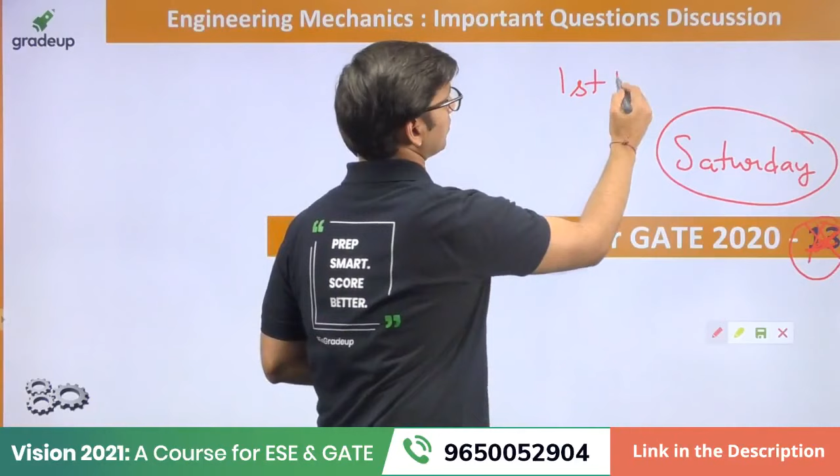So the GATE exam will be on 1st of February, that is on Saturday, so that is very, very important. And I hope you know that Gradeup will be conducting a live analysis on the same day of the GATE exam, where we'll be telling you the solution and expected cutoff on 1st of February after the exam.

I think there's some problem here. Well, I think there's some problem, we just have to hold for some time. First of all, this PPT is not going, the option below is not showing. Why is this not happening?

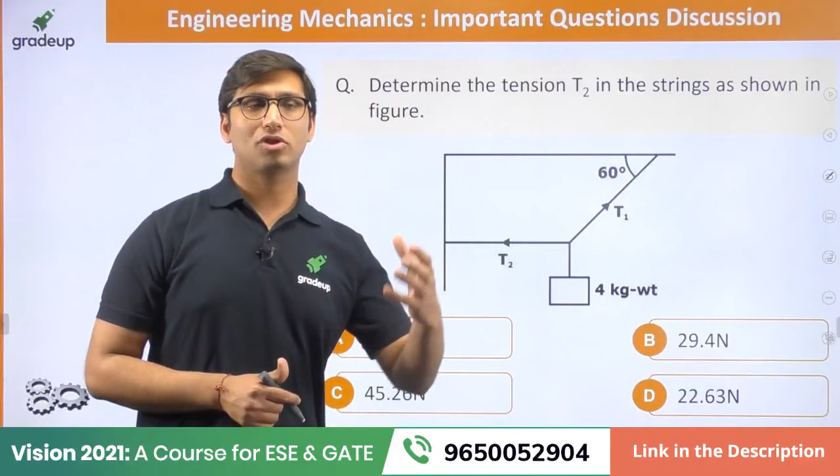Now this is the first question. Normally from free body diagram, the question comes from Lamy's theorem. I hope you know Lamy's theorem. In this question, you have to apply Lamy's theorem and tell me the answer. What is the value of tension T2? You have to determine the value of tension T2 in the string as shown in the figure. The figure is given here. You have to tell the correct answer. I am giving you 1.5 minutes for this question.

Ram Badan Yadav, firstly solve the question, tell me the answer, then I will tell you the solution. These questions are for your practice. Tell me the answer. I have given you a hint that you have to use Lamy's theorem. Whenever you see such a type of question, where there is a point load connected, three loads connected at a point, that is a concurrent system, meaning all the forces will be in equilibrium. So you can use Lamy's theorem. The angle given here is 60 degrees. You just have to find the angle between all the forces and you can solve the question very easily.

Santosh Kumar is giving 19.6. Naveen is getting option D, that is 22.63. Dharmendra Kumar is getting option B. Rishabh Chakravarti D. Amar Bare in the app is getting 22.63, that is option D. Mahesh Booster is getting 22.32 as the answer. So I think we have got enough responses.

The right answer for this question is option D. How to solve this question? To solve this question, you have to apply Lamy's theorem, because you can find these 3 forces are meeting at this point.

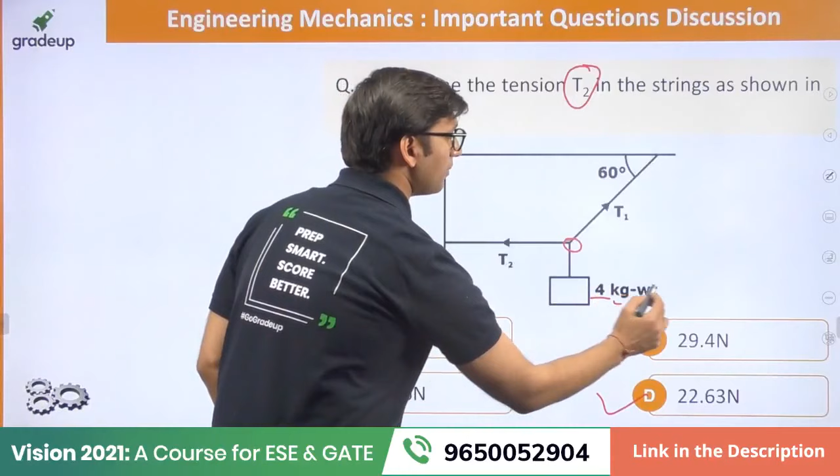Now the weight of this mass is given as 4 kg weight, so mass is 4 kg. Weight will be equal to what? Weight will be equal to 4 into 9.81, acting downwards. So this is the first force, this is the second, this is the third.

If this angle is 60 degrees, then by alternate angle property, this angle will also be 60 degrees. So if you solve by Lamy's theorem, you get T1 over sine of the angle between the forces. If this is T1, you find the angle between these, and that angle between these two forces is 90 degrees.

Then we have T2 over sine of the angle between T2 and these two forces. What will that angle be equal to? That will be equal to 150 degrees, so that's T2 over sine of 150 degrees.

Now this weight is 4 kg, acting downwards, so that equals 4 into 9.81 divided by sine of the angle between the other two forces. What is this angle? If this total angle is 60 degrees, then this total angle will be 120, so that will be sine 120.

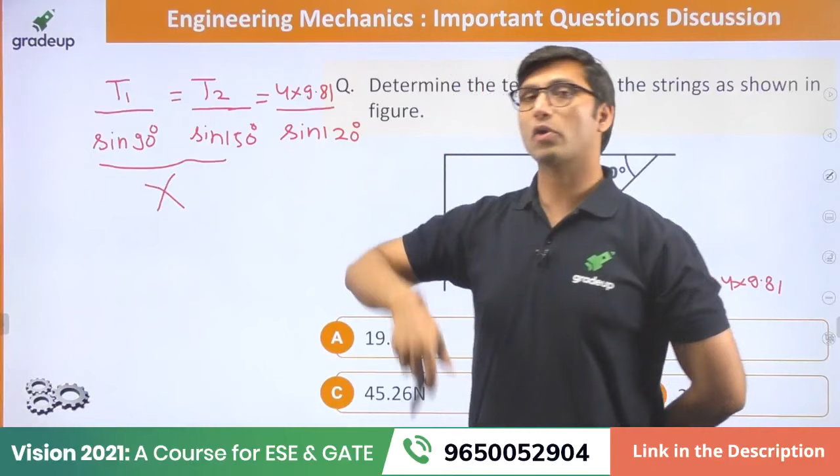Now tell me one thing: if you have to find the value of T2 and both T1 and T2 are unknown, you cannot use that equation to solve the question. You cannot use the first two relations because both are unknown here.

So if you have to find the value of T2, the only thing you can use is this relation, because you have to find the unknown tension T2. Here at least one force is known, the angle is known, and the weight of the body is known to you. So you have to use this relation to solve the question.

So T2 will be equal to sine 150 degrees into 4 into 9.81, divided by sine 120. From here you get T2 as 22.63 Newton. It's a very simple question, but you have to apply this concept.

Yes, those are the last two steps you have to use. You have to identify that in Lamy's theorem, which forces you have to take.

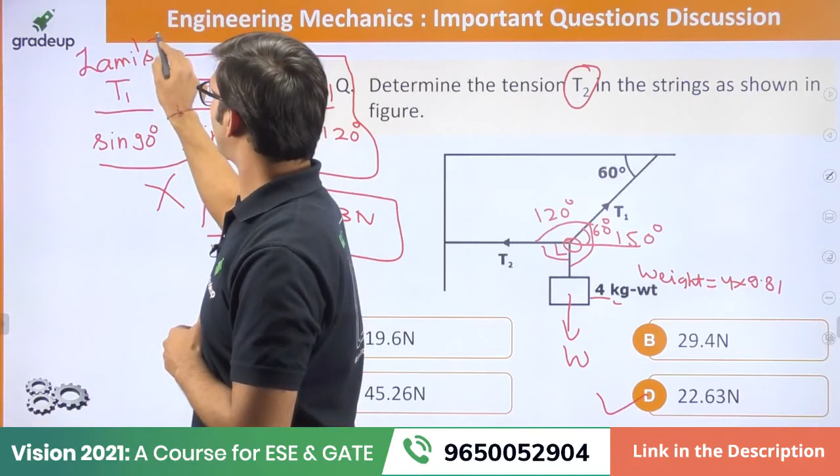Always remember, whenever solving questions on free body diagrams or trusses, try to minimize the number of unknown forces. So here two unknowns are there, but by taking this approach only one unknown remains.

Similarly, if in this question you have to find the value of T1, then you have to take this and this, because at least one force is known here. So whenever solving by Lamy's theorem, use this concept: find the angle between the other two forces, and you can solve the question very easily.

Next question: an object is acted upon by the forces given below, P1, P2, P3. If another force is applied to keep the object in equilibrium, given as AI plus BJ plus CK, then calculate the value of mod of A plus B plus C.

Again, the question is from free body equilibrium of forces. So solve the question and tell me the answer. Again, a very easy question.

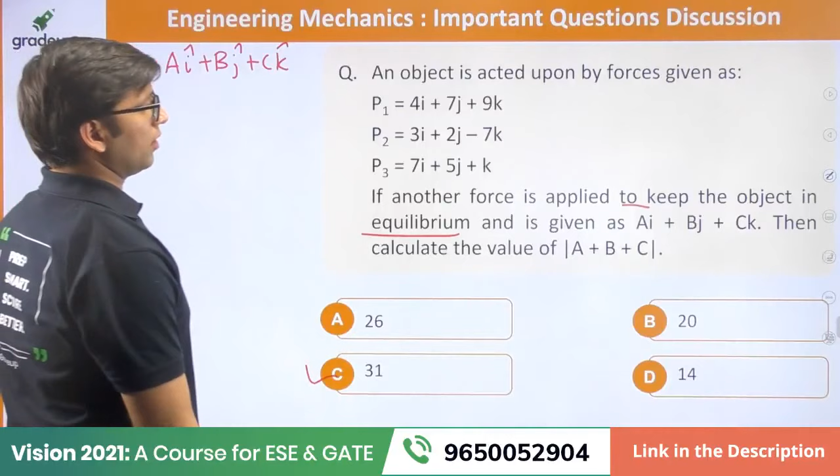Let us say the unknown force is equal to P4, and P4 is equal to AI plus BJ plus CK. Now, if all the forces are in equilibrium, as given in the question, we can say that the summation of all the forces will be equal to 0. So P1 plus P2 plus P3 plus P4 will be equal to 0.

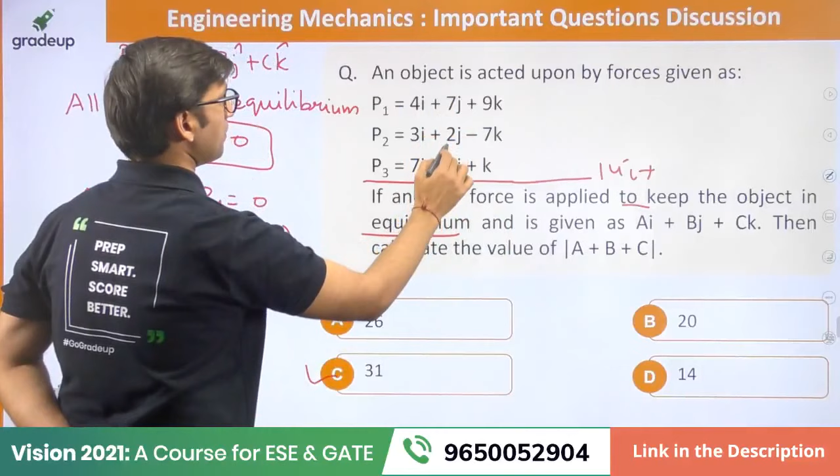So P4 will be equal to minus of P1 plus P2 plus P3. If you add all these 3 forces, you get 4 plus 3 plus 7, that is 14, so you get 14I. Then 7 plus 2 plus 5, that is 14J.

And then 9 plus 1 is 10, 10 minus 7 is 3, that is plus 3K. So you get this value as minus of 14I plus 14J plus 3K, or minus 14I minus 14J minus 3K. That is the value of P4.

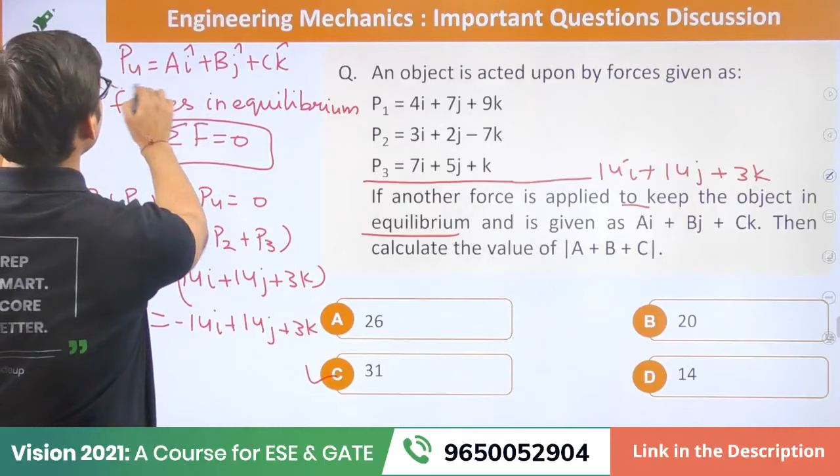Now P4 was equal to AI plus BJ plus CK, as given in the question that the unknown force equals this. So AI plus BJ plus CK is equal to minus 14I minus 14J minus 3K.

If you solve this, you have to find the value of mod of A plus B plus C. If you equate these two terms, you get A equal to minus 14, B equal to minus 14, and C equal to minus 3. So you have to find mod of A plus B plus C, meaning you have to find the positive value, you don't consider the sign.

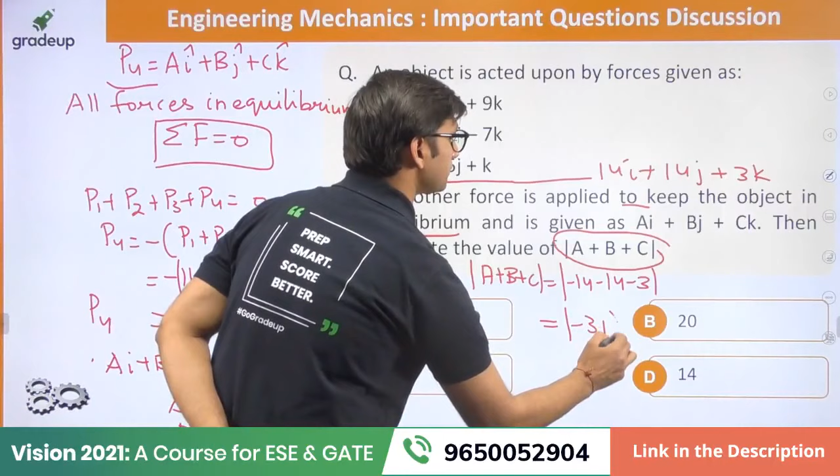From here, A plus B plus C will be equal to minus 14, minus 14, minus 3, which equals minus 31. And mod of any value gives a positive value, so you get 31. So the right answer is option C, that is 31. That was the approach to solving this question on forces in equilibrium.

So you can see we have got two types of questions: one was from Lami's theorem, and the other was from the forces in equilibrium concept.

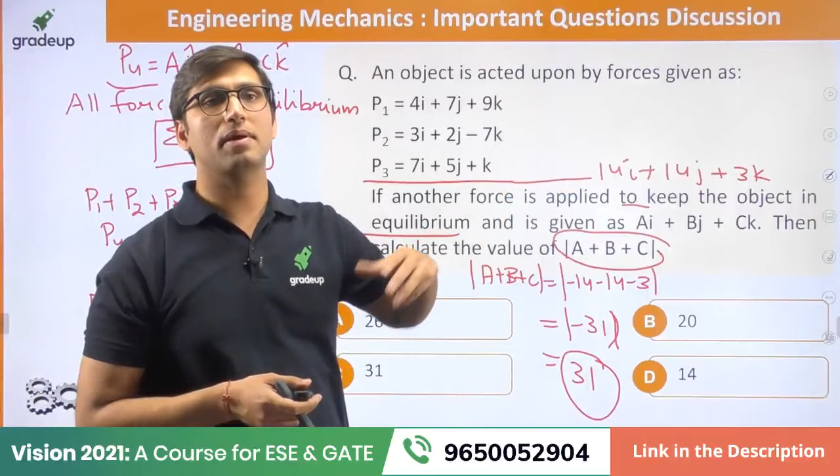Next question, this is from the impact and collision topic of engineering mechanics, again a very important topic, and questions also come from this topic. A small ball of mass 1 kg moving with a velocity of 12 meter per second undergoes a direct central impact with a stationary ball of mass 2 kg.

They are further saying that this impact is perfectly elastic. You have to find the speed of the 2 kg mass of the ball after the impact.

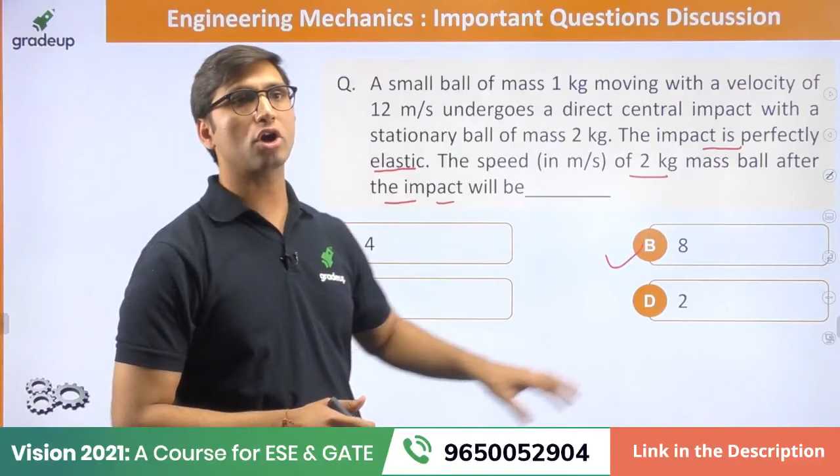Okay, so we have taken enough responses, I think I should tell you the answer. The right answer is option B. So those who have got option B, that is the right answer for this question. Now how to solve the question?

It is a concept of impact and collision. Let us say there are two balls colliding with each other. The mass of the first ball is 1 kg and the second is 2 kg. A small ball of mass 1 kg is moving with a velocity of 12 meter per second and collides with another ball that is stationary, meaning its velocity is 0 meter per second.

So this is before collision. Now let us say after collision, the 1 kg ball has velocity v1 and the 2 kg ball has velocity v2. So this is after collision.

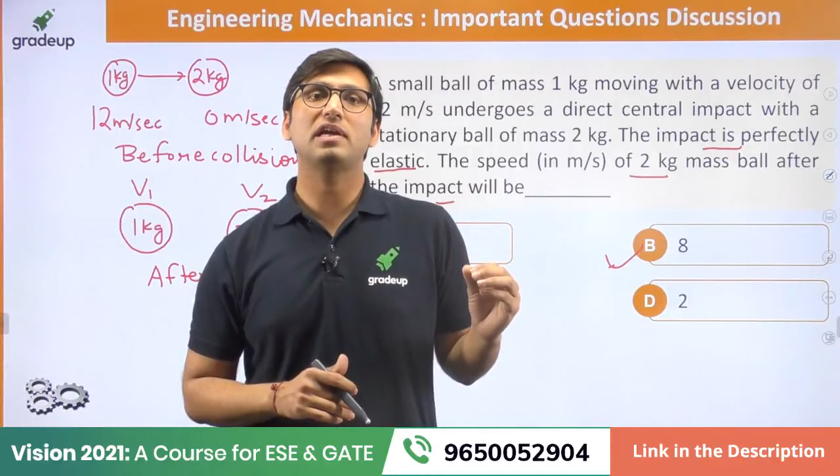In this question, they have told us to take the collision as a perfectly elastic collision. Now what are the conditions of perfectly elastic collision? One thing is for sure: linear momentum will be conserved. If it is elastic, perfectly elastic, or perfectly inelastic collision, linear momentum will always be conserved. So linear momentum is conserved.

Second thing, since it is a perfectly elastic collision, we use the coefficient of restitution. Do you know what is coefficient of restitution? Coefficient of restitution, that is E, will be equal to 1 if it is a perfectly elastic collision.

Now what is coefficient of restitution? It is equal to relative velocity after collision divided by relative velocity before collision.

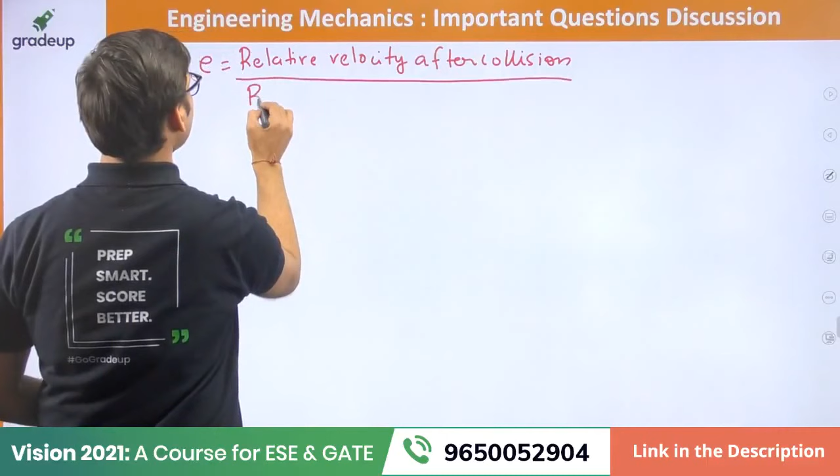Now what is relative velocity before collision? That will be equal to 12 minus 0. Relative velocity after collision will be equal to v2 minus v1. This is equal to E.

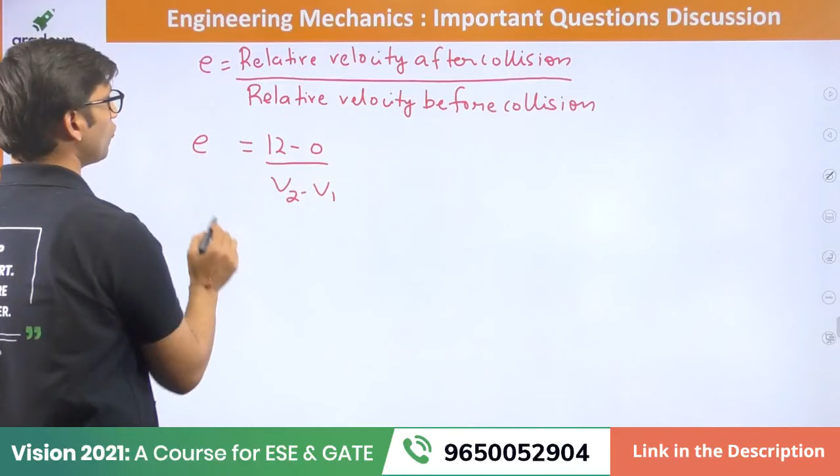Now E is equal to 1 for a perfectly elastic collision. This will be 12 minus 0 over v2 minus v1. So v2 minus v1 will be equal to 12. So you get this equation as the first equation.

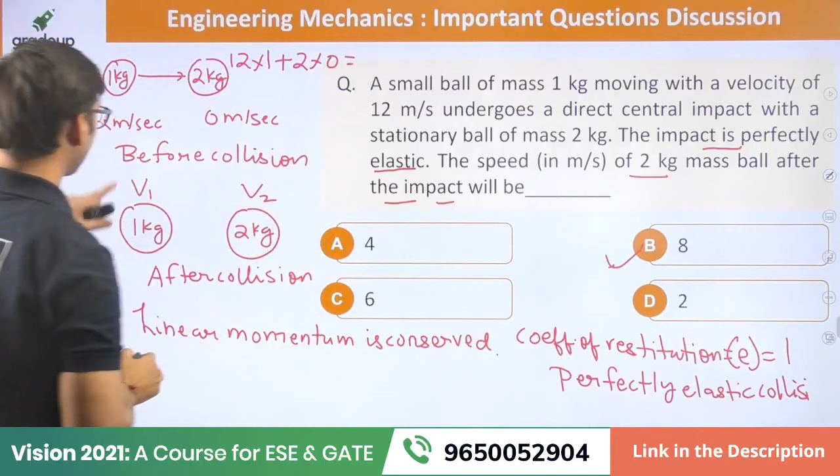Now this is the second equation. The first equation you get from the concept that linear momentum is conserved. If linear momentum is conserved, what can we say? Linear momentum equals mass into velocity. So in this case, it will be equal to 12 into 1 plus 2 into 0, which equals v1 into 1 plus v2 into 2. That is your first equation.

So what do you get from here? This is equal to 0, this is equal to 12. So you get v1 plus 2v2 is equal to 12. That is the first equation.

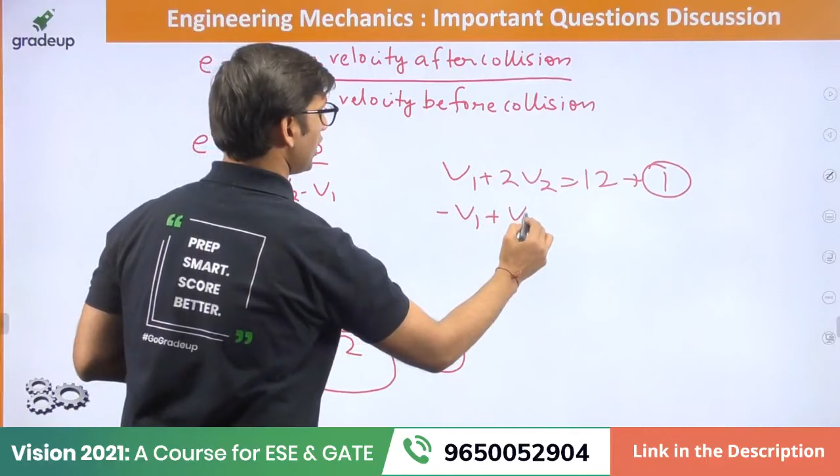And the second equation is minus v1 plus v2 is equal to 12. So we solve this. This gets cancelled, 3v2 will be equal to 24, so v2 will be equal to 8 meter per second.

So in this question, what do you have to find? You have to find the speed of the 2 kg mass after the collision or impact. That comes out equal to 8 meter per second. So the right answer is 8 meter per second.

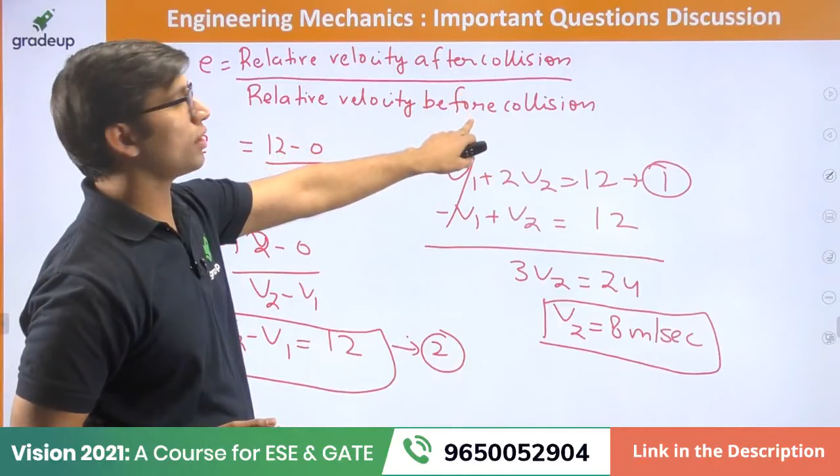Yes, coefficient of restitution is equal to velocity of separation over velocity of approach. You can say that also, that is also a definition. This is called velocity of separation, and this is called velocity of approach. Definitely you guys are right. The definition of coefficient of restitution: it is a term used for impact and collision, and it is defined as the ratio of relative velocity after collision divided by relative velocity before collision. So it is basically the term used for impact and collision.

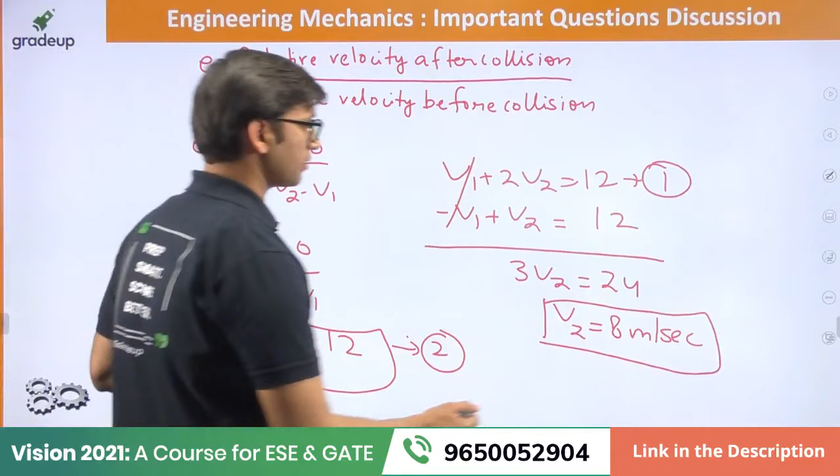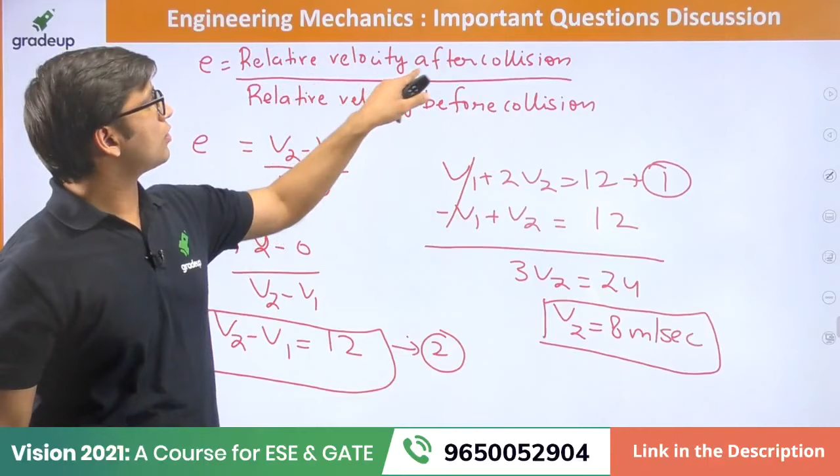Now, that ratio is not written inverse, that is correct. Relative velocity after collision divided by relative velocity before collision. Sorry, that is correct, not correct. So that will be equal to, it is correct, that will be equal to after, that is V2 minus V1 divided by 12 minus 0. That is correct. So it will be V2 minus V1 over 12 minus 0, because we are talking about relative velocity after collision divided by relative velocity before collision.

Next question is again from impact and momentum. This question is from the concept of impact. Impact involves impulse and momentum. Impulse is equal to the rate of change of linear momentum per unit time, that is called impulse. In this question you have to find the impulsive force. Whenever you hit an object, that is called an impulse. Impulse is always defined as force into time - the force applied on a body into time, that is called impulse. So in this question, a nail of mass 0.015 kg is driven into a fixed wooden block.

Yes, Shiva, what is the question? Can girls also give every exam conducted for mechanical engineering, or is there any restriction in some field of work? Shiva, what are you asking? This question is not at all relevant.

There is no restriction for any girls to give the gate exam. Even the fees for the gate exam is also half, I think, as compared to the boys - for male as compared to female, the fees is also half, I think it is 50%. So yes, there is no restriction, why would there be any restriction for girls? There is no restriction for girls in any exams. But I think you should not ask this question, it is given in the brochure of the gate exam. So that is already given there. Girls can give any exam, they can go into defense, they can give gate exam, they can give ESE exam, they can give any kind of exams. There is no restriction for girls.

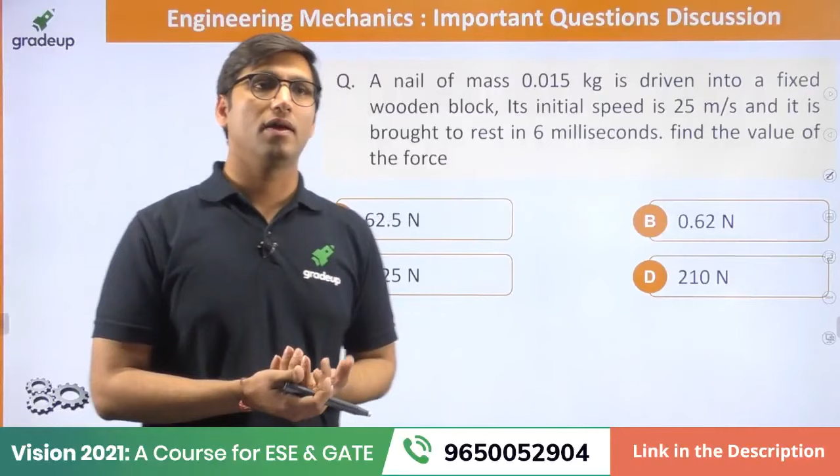We are practicing some good quality, important questions from engineering mechanics. If you don't know about impulse, you really need to brush up your concept again. The right answer for this question is option A, that is 62.5. In this question, they say a nail of mass 0.015 kg is driven into a fixed wooden block.

Its initial speed is 25 and it's brought to rest in 6 milliseconds. Find the value of the force. So what are they saying? They are asking to find the value of force.

This force is equal to rate of change of linear momentum, that is rate of change of linear momentum per unit time. That is called this force. So that will be equal to m of v2 minus v1 divided by time.

Now what is the velocity given here? The velocity in this question is given as the initial speed, which is equal to 25, and the final speed is equal to rest, that means it has come to rest.

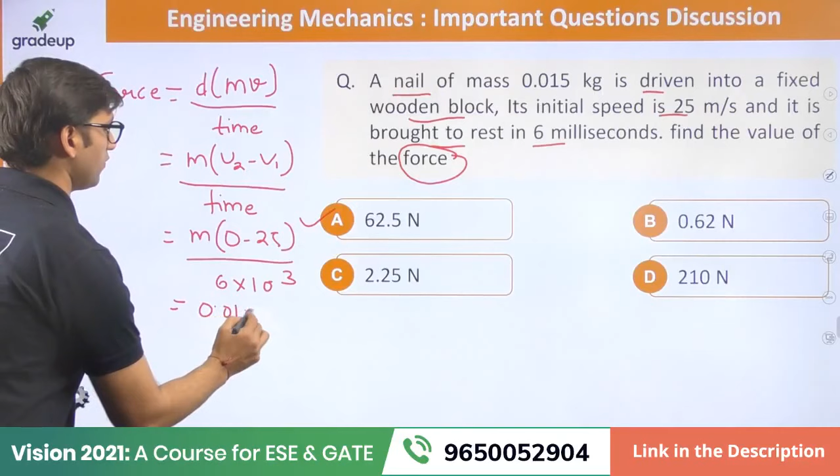So that will be equal to m of v2, which is 0, minus 25, divided by time. Time is equal to 6 milliseconds, that is 6 into 10 power minus 3 second. So mass is equal to 0.015 into minus 25 divided by 6 into 10 power minus 3. From here you will get this value as 62.5 Newton, that is the value of force.

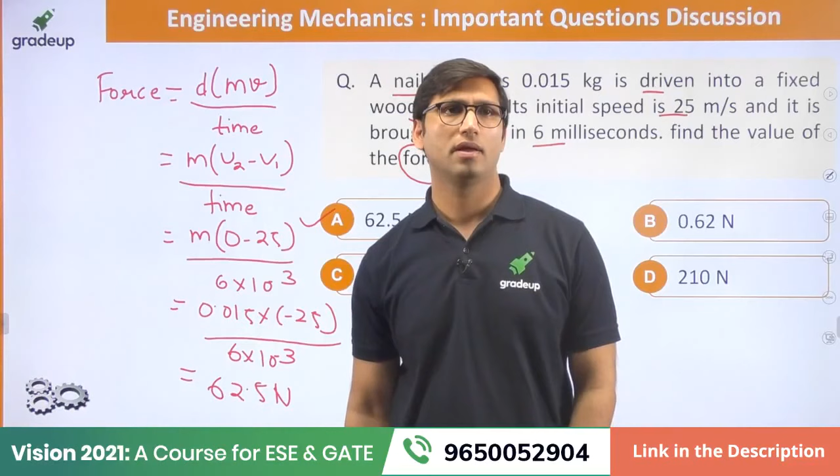I used V is equal to U plus A times T, then I put V equal to 0, and A equal to F by M. You can use any approach for solving this question, ultimately you have to find the force. Either you can use that kinematics equation, V equals U plus AT, from there also you can solve the question.

This engineering mechanics is one of the basic subjects. In this question you have to use the concept of impulse: force is equal to rate of change of linear momentum per unit time. This can also be solved by that equation of kinematics, V equals U plus AT, that can also be used for solving the question, that is F equals M into A.

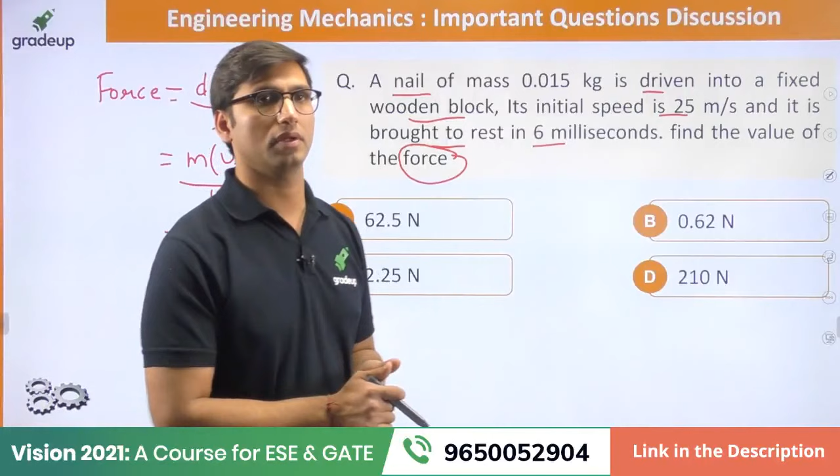So force, mass is given, acceleration you can find from there. Yes, that question can be solved from there also. Sasat Bhattacharya, are you getting the answer by that approach?

So this question can also be solved by V equals U plus AT. Here U is 25, V is equal to 0, so 25 plus A into T, that is 6 into 10 power minus 3. From here you will get the acceleration, and F equals M into A. Mass is given, A you can find from here, so the answer you can get from here also.

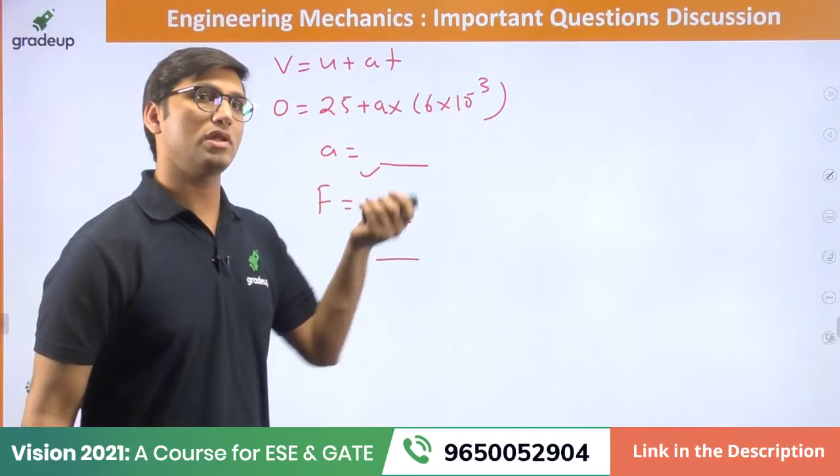We can get the answer from both the approaches. So it's totally up to you which approach you want to use for solving the question, but your concept should be clear in your mind.

Next question: the initial velocity of an object is 40 meter per second. The acceleration A of the object is given by the expression A equals minus 0.1 V, where V is the instantaneous velocity of the object. Find the velocity of the object after 3 seconds. Again a good question from the topic of kinematics of body, so you have to use the equation of kinematics to solve this question.

Come on guys, hurry up, it is a very simple question. Acceleration is given to you. This question again is from the topic of kinematics; you have to use that approach of kinematics and you can solve the question very easily.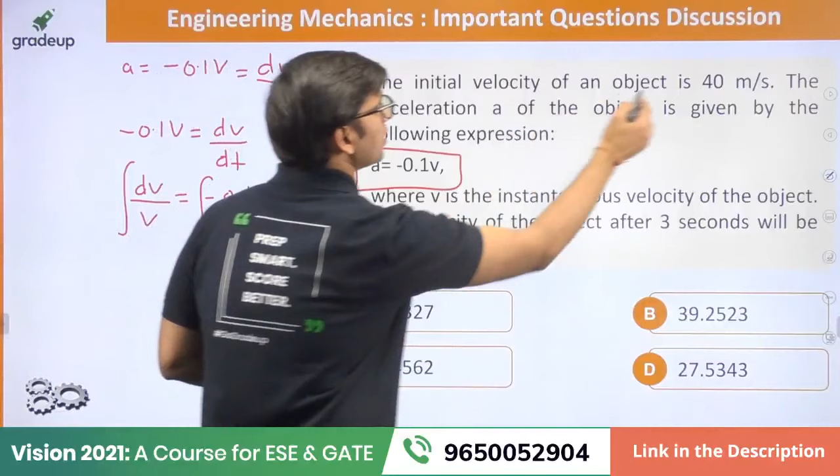So you just have to integrate. The initial velocity is equal to 40, and you have to find the final velocity after 3 seconds. So the limits will be 40 to V, and time from 0 to 3 seconds.

Integrating, you get log of V from 40 to V equal to minus 0.1 into 3 minus 0. So log V minus log 40 is equal to minus 0.3. Solving this equation, log V equals log 40 plus minus 0.3. Taking the anti-log of V, you will find the answer, V equal to 29.63 meter per second, the final velocity after 3 seconds.

So the right answer is option A. Those who have got option A, that is the right approach to solve this question. These are some basic questions; we have not yet moved on to the tough questions. Now let's move on to the next question.

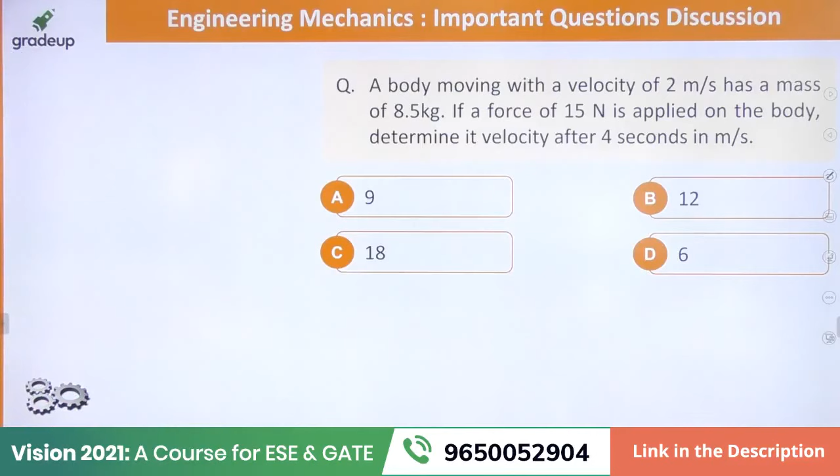A body moving with a velocity of 2 meter per second has a mass of 8.5 kg. If a force of 15 Newton is applied on the body, determine its velocity after 4 seconds in meter per second. Again, a very simple question from the basic concept of engineering mechanics. The force is given, mass is given, velocity is given. You have to find the velocity after 4 seconds.

Vignesh Rana is getting option A. Very quick, Vignesh, very good. Come on guys, you have to be quick like Vignesh and Mahesh Booster. He is boosting his preparation at such a level that he has named himself Mahesh Booster. I know that is not your original name. Adarsh is getting option A for this question. Balaji is getting option A. Nani Charan is getting option A. Shrikant getting option A, Samruddhi is getting option A, Dharmendra Kumar option A, Maddie is getting option A.

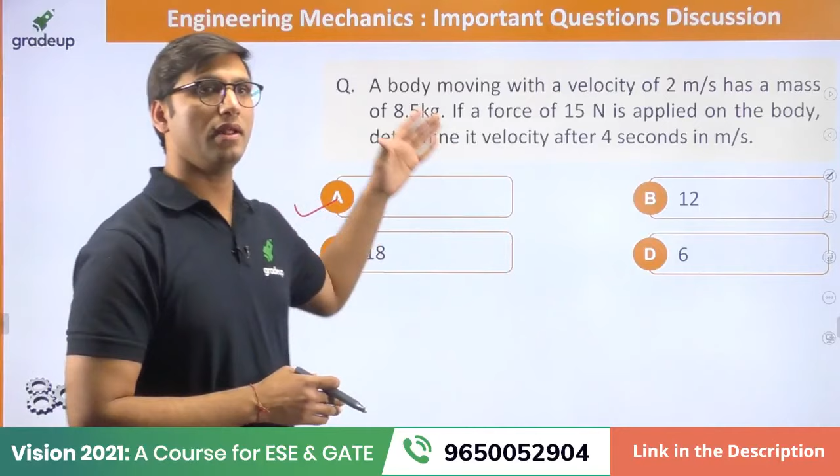I think we should not waste much time on this question, it's very simple. How to solve it? The force is given, mass is given, so F is equal to m into A. From here, acceleration equals F by m, that means 15 divided by 8.5, which gives 1.764, the value of acceleration.

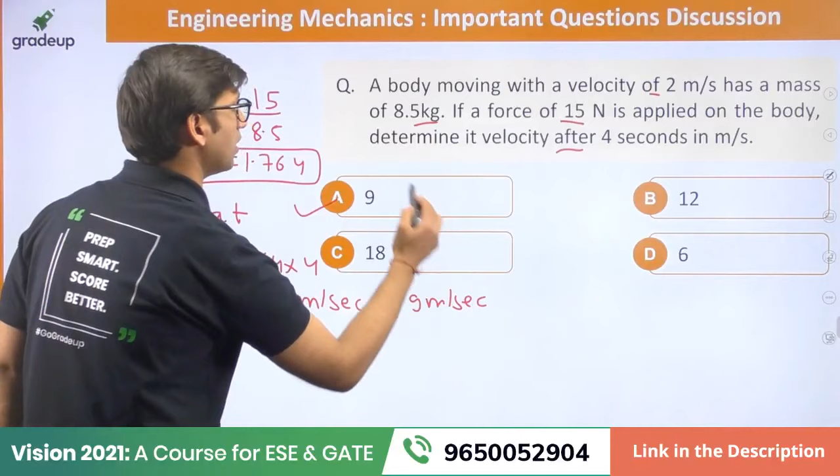Now from the first equation of kinematics, V is equal to U plus AT. You have to find the velocity after 4 seconds, and acceleration you have got. Initial velocity U is equal to 2, so V equals 2 plus 1.764 into 4. Very easy question, you get the answer as 9.05 meter per second, approximately 9 meter per second. So those who got option A, that is the right answer for this question.

Now we have reached another topic. We have practiced the question of free body diagram and equilibrium, and also Lamy's theorem along with kinematics and impulse and momentum.

Let's solve some question of trusses now. In this question they have given a framed structure of height 2 meter and 6 meter span. 6 meter is the total span, that is total length of this structure. It is subjected to 2 point loads at B and D.

So there are 2 point loads. One point load is 8 kilonewton at B. Another point load is at D, suppose this is D. This is another point load, that is 14 kilonewton.

You have to find the reactions at A and C. So you can take your time. I am giving you 2 minutes for this question. Solve it and then tell me the answer.

Balaji, have you already seen this question? How can you be so quick? Dharmendra Kumar is getting option A, Vignesh Rana is getting option A, Balaji is getting option A, Ashutosh Sahu is getting option A. How you guys are so quick? How you are getting the answer very quickly? Very good.

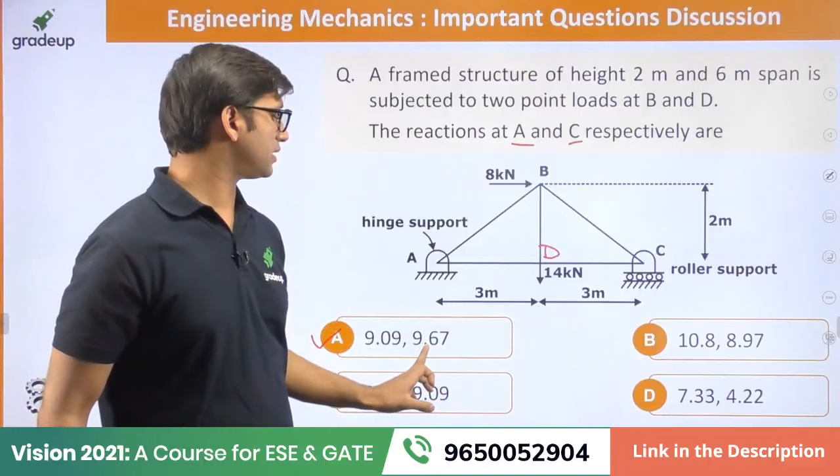If you can solve any one of the reactions, you can match from the options. So if you have to solve the reaction C, you can find that if reaction C is coming out to be 9.67, that is the right answer. That can only be the right answer.

So how to solve this question? They have given that this load is equal to 14 kilonewton. If you remove the roller support, you will get a reaction RC here. If you remove the hinge support, you will get two reactions: one in the horizontal direction RAH, another in the vertical direction RAV. One force of 8 kilonewton is applied here. This distance is equal to 2 meter, and this is 3 meter, and this is 3 meter.

Now the question is how to find the value of reaction at C and the total reaction at A. The total reaction at A will be the resultant of the forces in the horizontal and vertical directions. At the hinge support you get two reaction forces, horizontal and vertical, so to find the total reaction force you have to find the resultant. Now let's start it.

If you have to find this value, you have to equate using equilibrium of forces in the vertical direction, putting it equal to 0. So in the vertical direction we have RAV, 14, and RC. So we have got two unknowns here. You cannot solve this question like that. So how can we solve this question?

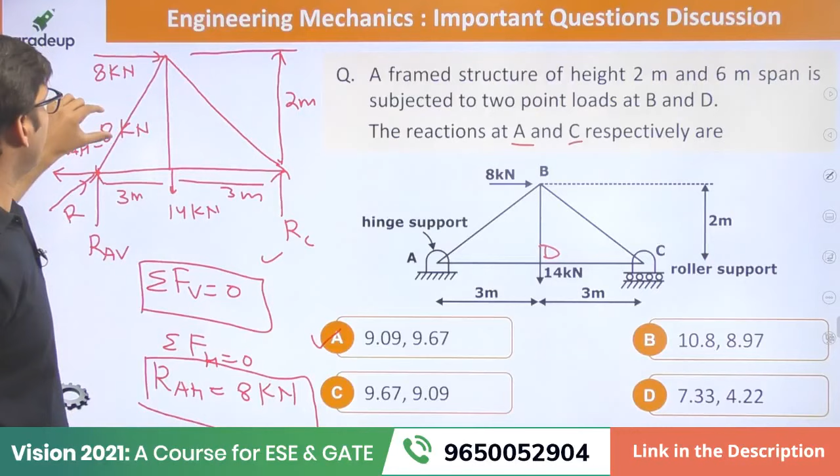Now how to find the value of vertical reactions at A and C? The next approach is to apply equilibrium of forces in the vertical direction, that means RAV plus RC is equal to 14. But this also cannot be used alone for solving the vertical reactions because there are two unknowns here. So how are we going to solve it?

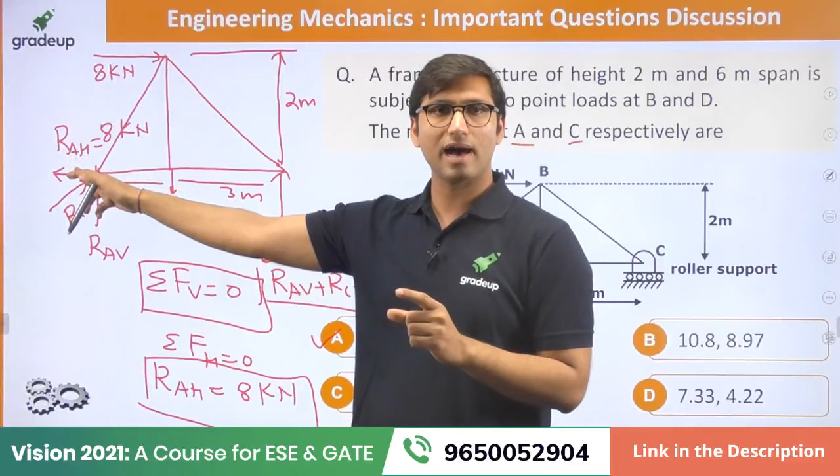Then you have to apply the moment equation. Now the equilibrium of moment can be applied at which place? It should be applied at that support which has got maximum unknowns. Here we have got at least RAH, but we can apply it either at point C or at point A. Let us apply this at point A.

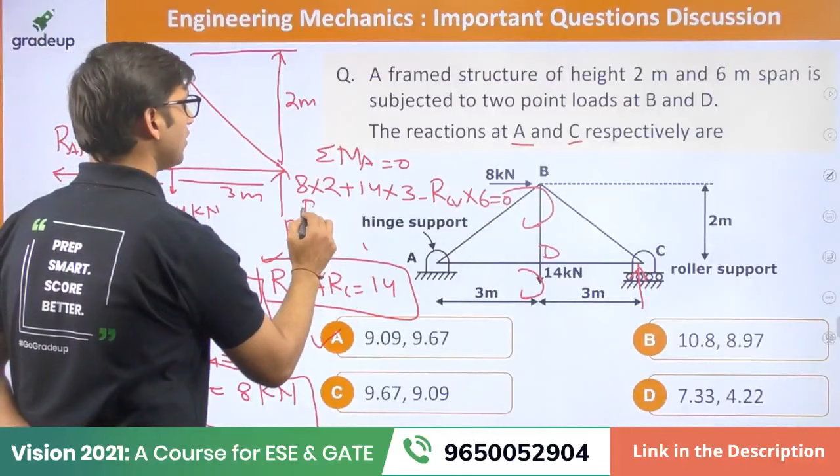Let us apply the equilibrium of the moment at point A and set it equal to 0. The 8 kilonewton force will produce a clockwise moment of 8 into 2. Then we have the force 14, which will also produce a clockwise moment of 14 into 3. Next, in the vertical direction, we have minus RCV into the total distance of 6, equal to 0. Solving this, you get the value of RCV, which comes out to be 9.67 kilonewton, the vertical reaction at point C.

Now how do we find the vertical reaction at point A? Using the equation RAV plus RCV equals 14, you just substitute the 9.67 value to get RAV, the vertical reaction at A. So in this equation, you have to find the reaction at C and total reaction at A. The reaction at C comes out to be 9.67, and from the options you can easily get the answer.

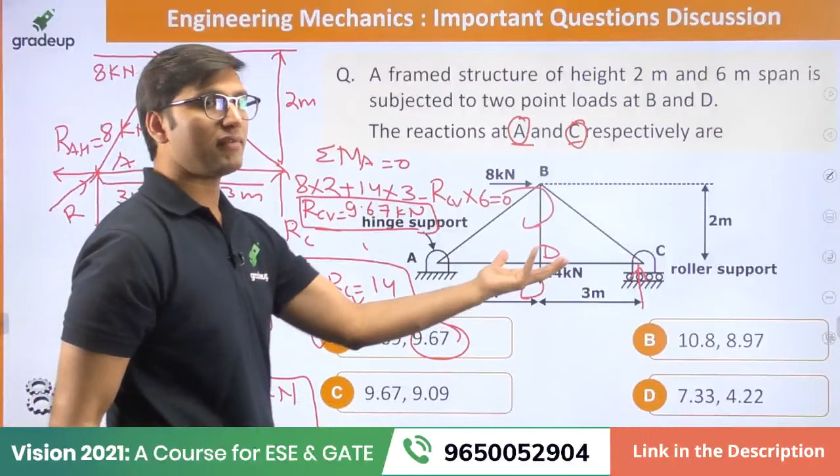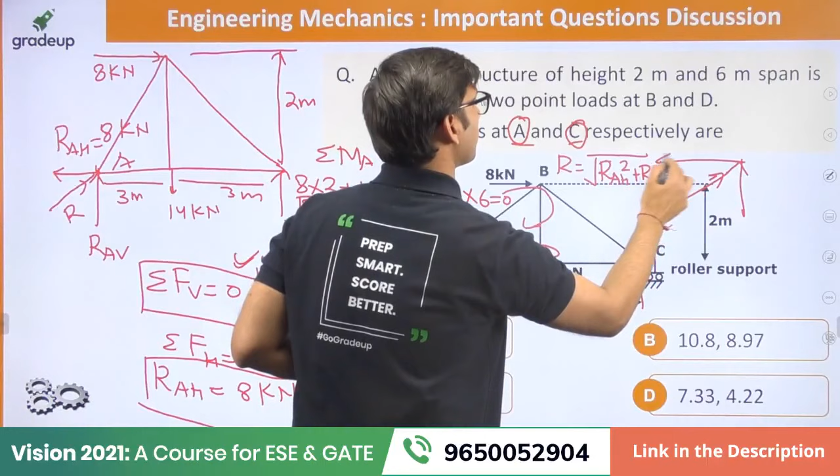But to find the reaction at A, we have two forces, one horizontal and one vertical. So you have to find the resultant of these two forces, which equals the square root of the horizontal reaction squared plus the vertical reaction at A squared. You have the value 8, solve from here and the answer comes out to be 9.09. So for those who haven't solved the question, that is the approach. You have to apply equilibrium of forces and equilibrium of moment. Try to apply the equilibrium of moment at the point with maximum unknowns, it will make the equation much easier to solve.

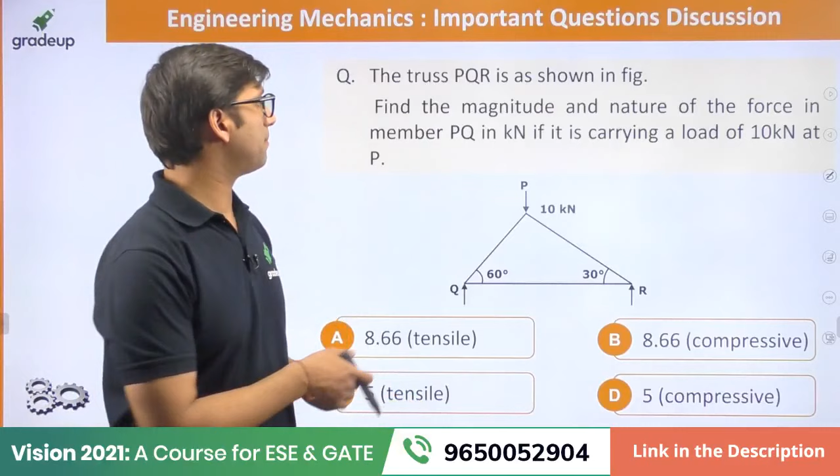Next question, again from the concept of trusses. A truss PQR is shown in the figure. Find the magnitude and nature of the force in member PQ in kilonewton if it is carrying a load of 10 kilonewton at point P. So you have to find force PQ, that means this is force PQ and this is force PR. Use any method that comes to your mind and solve the question.

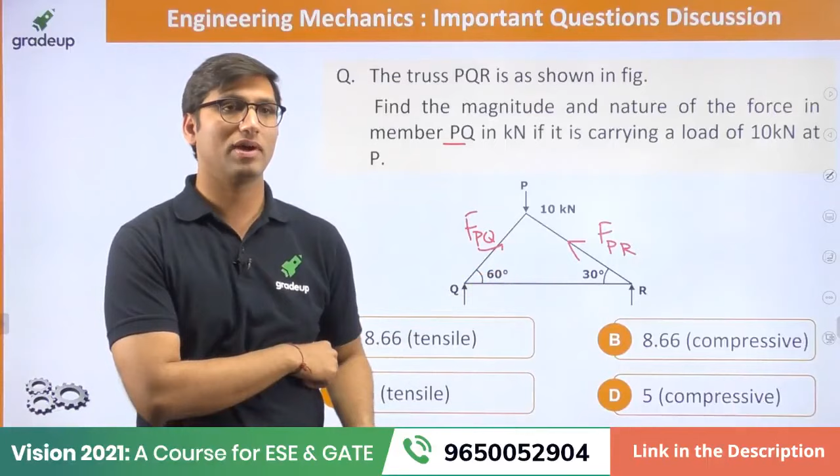In this question they have given this angle as 60, and this as 30. So the total angle equals 180, meaning this is 90 here. So what do we have to find in this equation? We have to find the value of FPQ, the force PQ, and its direction.

Amar Bar is saying 8.66 compressive. Vignesh Rana is getting option B, that is 8.66 compressive. Arbaz Khan is saying compressive 5, meaning option D. Surya is getting option C. Sridhar is getting option B. On YouTube, Rishabh Chakravarti is getting minus 8.66, option B. Mahesh Booster is getting option B too. Looking at the answers in the app and on YouTube, most students are right for this question. The correct answer is option B.

In this question, to find the force FPQ, note that FPQ is the reaction force. This is point P, this is Q, so the force acts in this direction. If you apply the moment, here is P equal to 10 kilonewton, this is FPQ, sorry, FPQ, and this is FPR. This angle is 60 degrees, so this angle will also be 60 degrees, and this is 90, making the complete angle equal to 150 degrees. Similarly, if this angle is 30 degrees, this angle will be 30 degrees too, and the complete angle will equal 120 degrees.

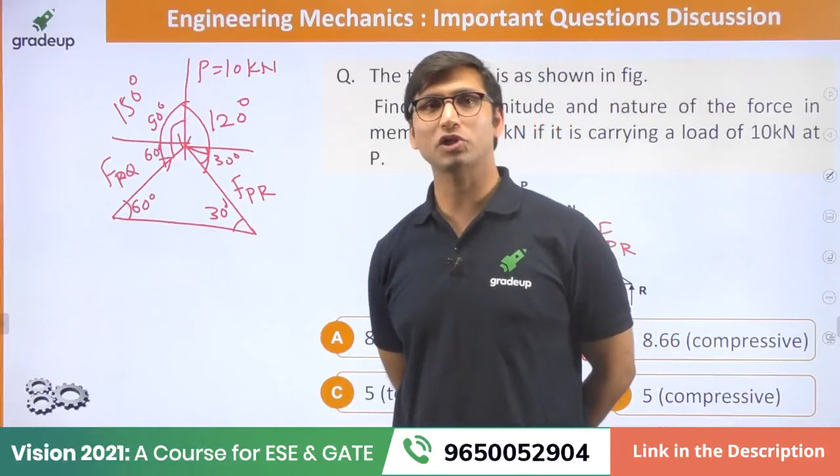Now, this question looks like it is a question of truss, but it can be solved by the concept of Lamy's theorem. You can use Lamy's theorem for solving this question. How can you solve it?

Force FPQ over sine of the angle opposite between force P and PR, which is equal to 120 degrees, equals P over sine of the angle between these two forces, which is 90 degrees. The value of P is 10 kilonewton, divided by sine 90.

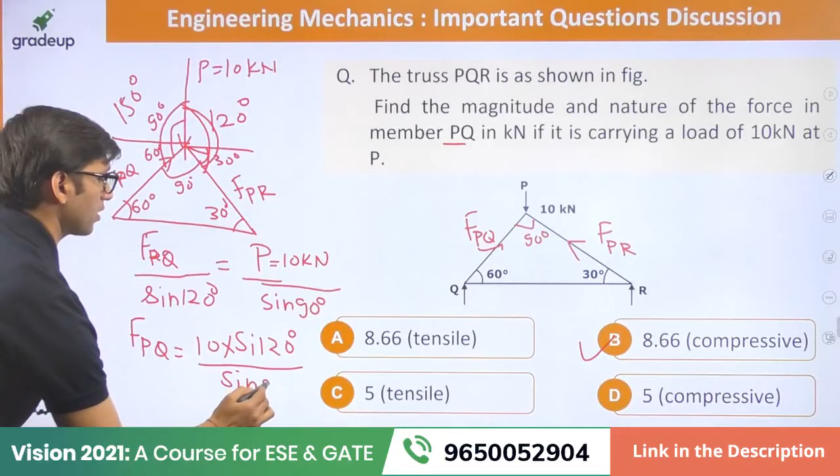We don't need to apply Lamy's theorem for the third part because you only have to find PQ, so that can be solved using this equation only. FPQ equals 10 into sine 120 divided by sine 90. By solving it, you get minus 8.66. Since the value of FPQ comes out negative, the nature of the force is compressive. The right answer is 8.66 compressive.

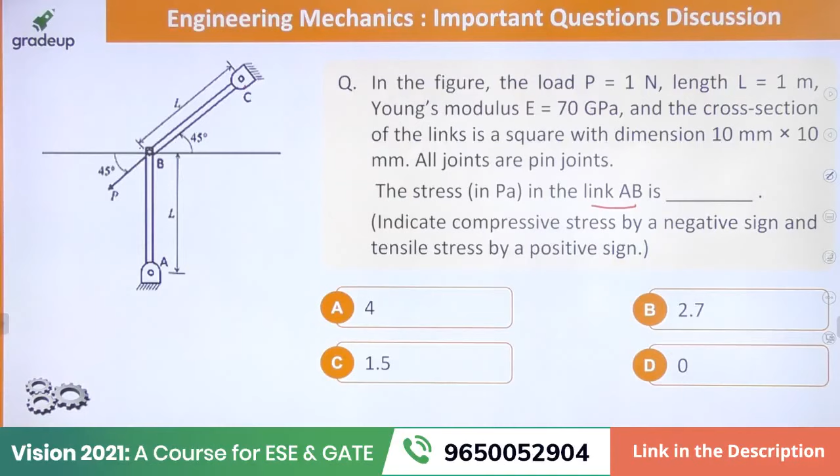So, have you got the answer? Sumit Kumar in the app is getting option C. Sridhar is getting option D. Sumit Kumar is getting option B. Amar Bare is getting 0, that is option D. In the YouTube comments I can see Ahmed Dargah getting option D. Tech Up Rice says okay, no force no stress. Rishabh Chakravarti is saying okay.

Yes, the right answer is option D, and as Rishabh said, no force, no stress. First you need to find the force for link AB, and since stress equals force per unit area, let's find the force. From this equation, the reaction force comes out as P, and at point B we have reaction force FBC and force FAB downward.

So we have these three forces, and again we use Lami's theorem. If this angle is 45, this force is FAB, and the other two forces are FBC and P. To apply Lami's theorem, we find the angle between the other two forces: 180 degrees, opposite to force FAB. So FAB over sine 180, and for P, if this angle is 45, the complete angle is 90 plus 45, giving P over sine 135.

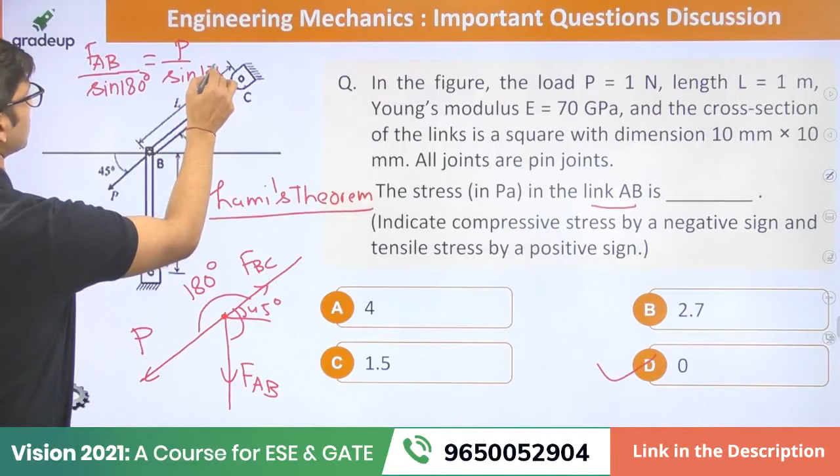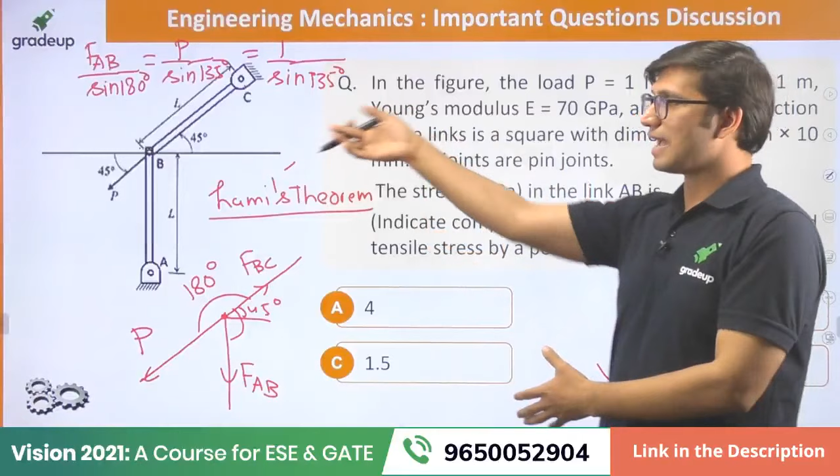In this equation they've given the value of P. We only require these two equations to solve our answer. If P equals 1, then FAB equals sine 180 divided by sine 135. It looks like a very tough question with many values given and a complicated diagram, but that's a good thing about the GATE exam - questions are often like that. Sin 180 is equal to 0.

So if you put that side, you will get FAB come out to be 0. If the force in member AB is equal to 0, the stress will also be equal to 0. So the right answer is 0 here.

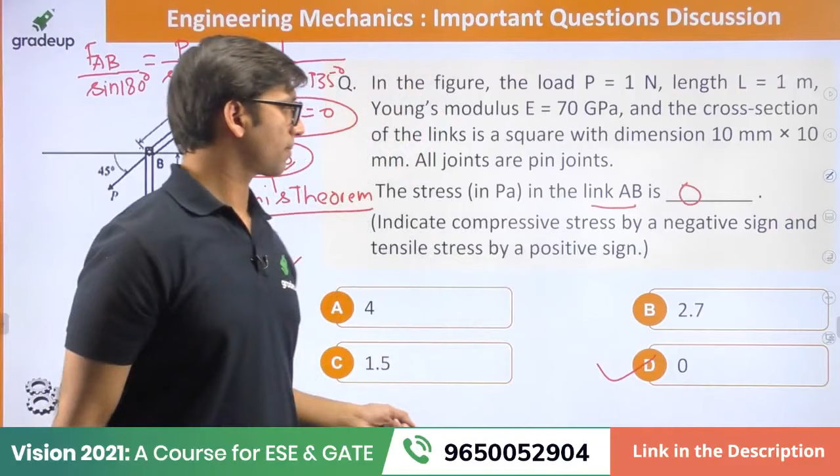Next question: the value of tension in members EF and EA respectively. Again, there is a question on truss here. They have given that this is point A, this is B, C, D, E, F, and the distance is also given. You have to see the diagram and solve the question. Everyone please solve it quickly.

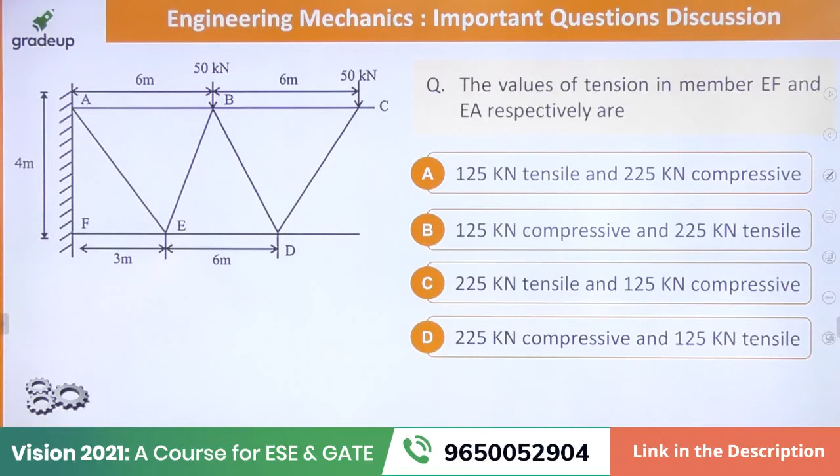Have you solved the question? Shashank is getting option B. Sumant Reddy is getting 0. I hope you have seen the diagram, the question, and the options. Alok Singh Negi is getting option C, though he first said D then changed to C. Mahesh is getting 0 - is it really 0, Mahesh? Because 0 is not an option here. Dhruv is getting 0 again. Ashutosh Sav is getting 0. Pramod Deva, I think you gave the answer for the previous question. Dhruv is now getting option D.

Well, for this question, the answer will be option D, that is 225 kN compressive and 125 kN tensile. That will be the answer.

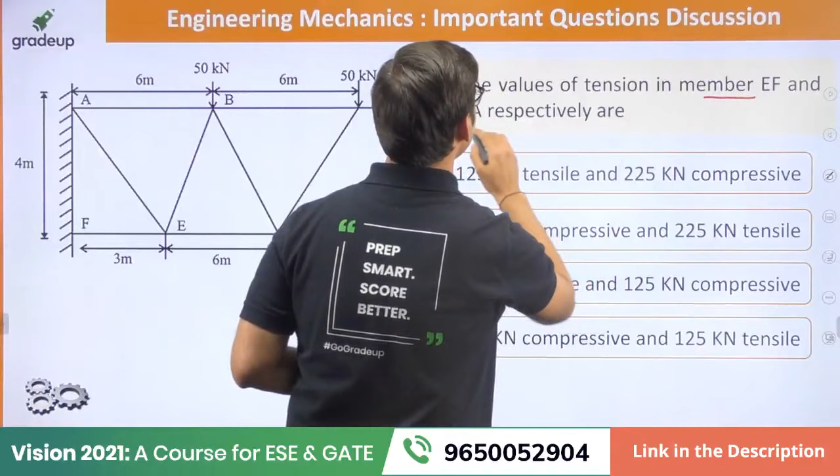Now, how to solve this question? In this question, you have to find the reaction and the tension values at EF and EA. This value will be equal to EA. The force FEA will be in this direction, and force EF will be in this direction, because you have to find the tensile force.

Now, if you have to find the value of the reactions, how can you solve it? You have to apply the moment at any point. Let us find the moment at A, applying the moment at point A and putting it equal to 0.

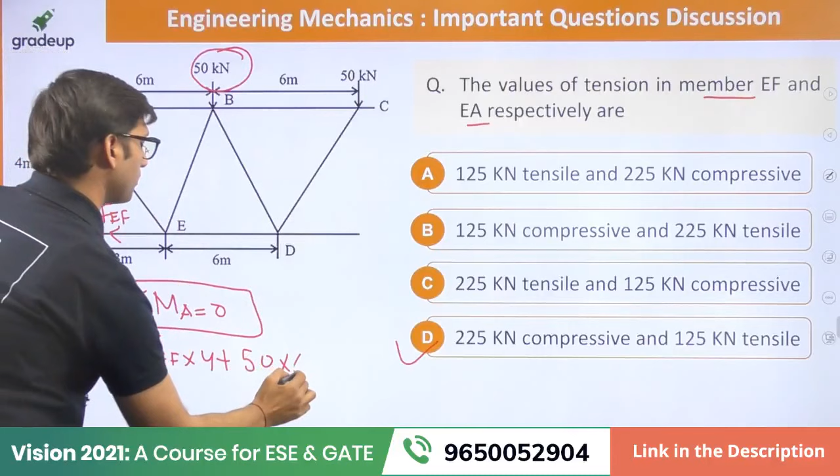That will be equal to force EF into 4, producing a clockwise moment, plus 4, plus this 50 kilonewton plus 50 into 6 plus 50 into 12, which will come out to be 0. From here you will find the value of force EF, and that comes out to be minus 225 kilonewton.

Since the value of force EF is coming out to be minus 225, that means it is a compressive force. So no matter which direction you choose, see, this is a reaction here. This reaction force will provide a reaction in this direction, and the tensile force will be in the opposite direction of this reaction force, so definitely the tension force will be in this direction.

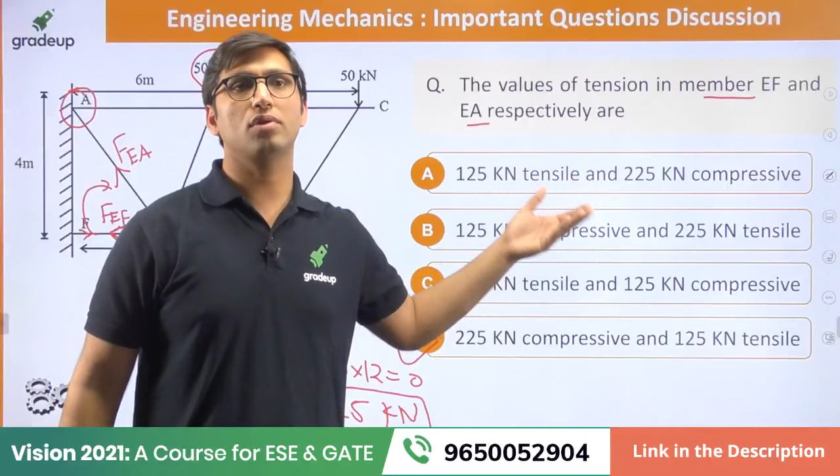That will be the direction of tension. Tension force is a pulling force, so accordingly you can choose the direction of tension. And if you solve the question, you will get a sign of the force, and from the sign of the force also you can solve the question. So from here you get FEF as the answer, that is minus 225, and since it is minus, it will be compressive.

Now how to find the value of FEA? That can be solved with the help of the force balance equation. If this is EA, if this is the value of EA, applying the force balance equation, the total reaction is given to be 50 kilonewton, and this is also 50 kilonewton. So this angle, let us say this angle is equal to theta.

If this angle is equal to theta, there will be a reaction in this direction equal to FEA sin theta, and this FEA sin theta minus 50 minus 50 will be equal to 0. So FEA into sin theta will be equal to 100. Now how will you find the value of sin theta?

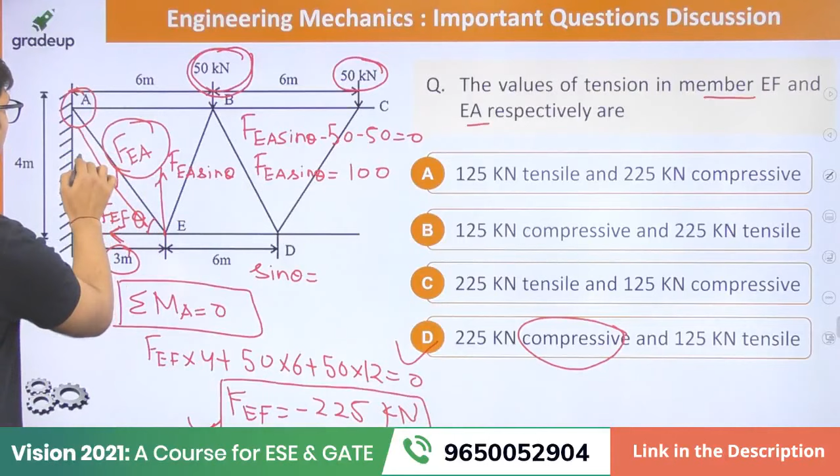This is theta, so sin theta will be equal to perpendicular over hypotenuse. So if this is 4 and this is 3, this value will be equal to 5, this length will be equal to 5. So that means this is equal to 4 over 5.

So if you put this value, you will get FEA into 4 over 5 is equal to 100. From here you will get the force FEA will be equal to 125 kilonewton, and that will be equal to positive force.

If you are feeling problem in selecting the direction, you just have to remember one thing: by calculation you will get the sign of the force. If it is coming out positive, that means it's a tensile force. If it's coming out negative, it will be a compressive force.

So this value will be equal to 125. By solving it, it is a positive value, so it is a tensile force, and 225 is coming out to be negative, so it is a compressive force. So the right answer is option D. Those who got option D as the answer, that is correct.

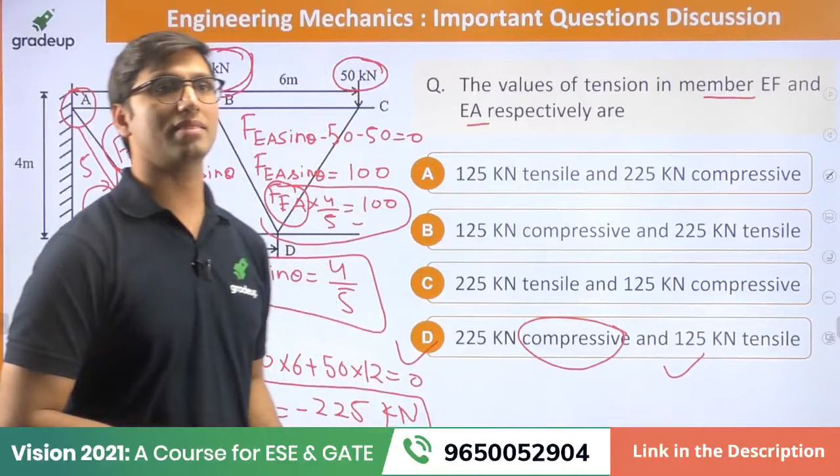Well, this question is from the concept of friction. Sorry Gupta, this topic comes under GATE aerospace. I am not sure about the aerospace branch, but yes, this topic is important for mechanical and civil branch.

This kind of question is important because if you see the previous year question of GATE 2019, there was a question from this kind of concept. So you have to solve the question and tell me the answer. This concept is very important.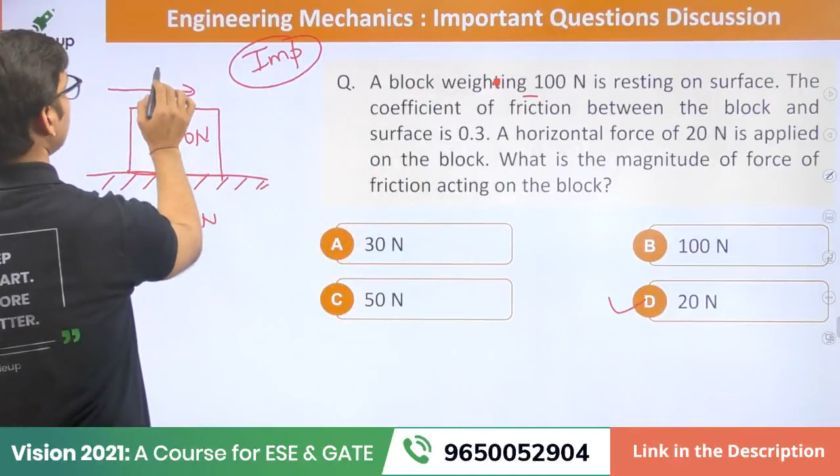A force is applied which is equal to 20 Newton, in this direction. The weight is 100 Newton. So there will be a reaction force in the opposite direction which will be equal to 100 Newton. If the weight is 100 Newton, the normal reaction will also be 100 Newton.

So the force of friction will be in the opposite direction of the motion, let's say in this direction. Now the maximum value of force of friction, also called the limiting value, will be equal to mu into N. Mu in this equation is given as 0.3, so it will be 0.3 into N, where N is equal to 100. That is 30 Newton.

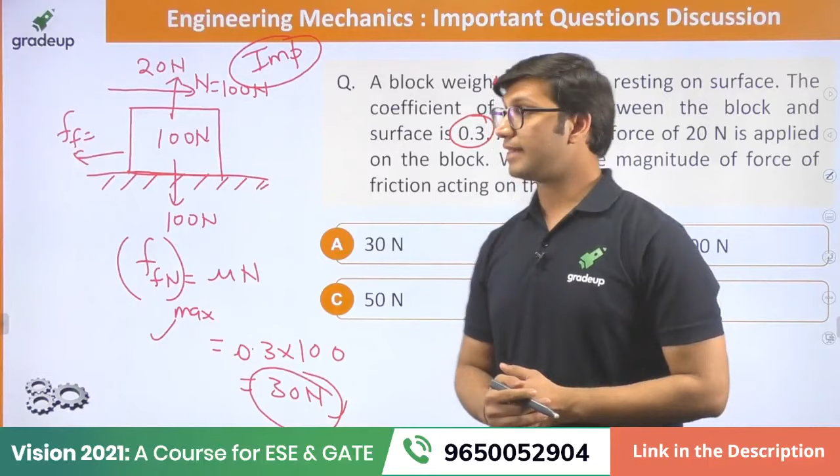Now let's come to the approach for solving such kind of question. The maximum value of friction force is coming out to be 30 Newton, and the applied force is equal to 20 Newton. Now there is a graph between this maximum value: if there is a graph, this is the applied force and this is the friction force. This graph is somewhat like this, that is the maximum value of friction force.

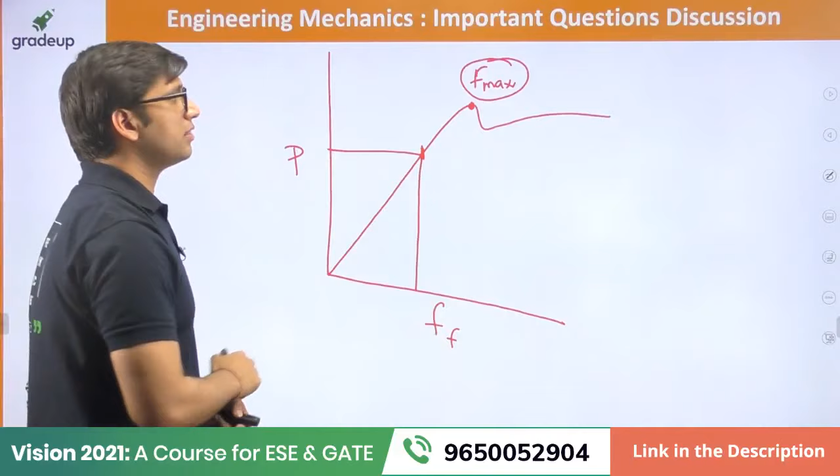Now if the value of maximum friction force comes out to be more compared to the applied load, then this friction force has to be equal to the applied load. In this equation, maximum value is coming out to be 30 Newton and applied load is 20 Newton. That means the object cannot move because the friction force is greater than the applied load.

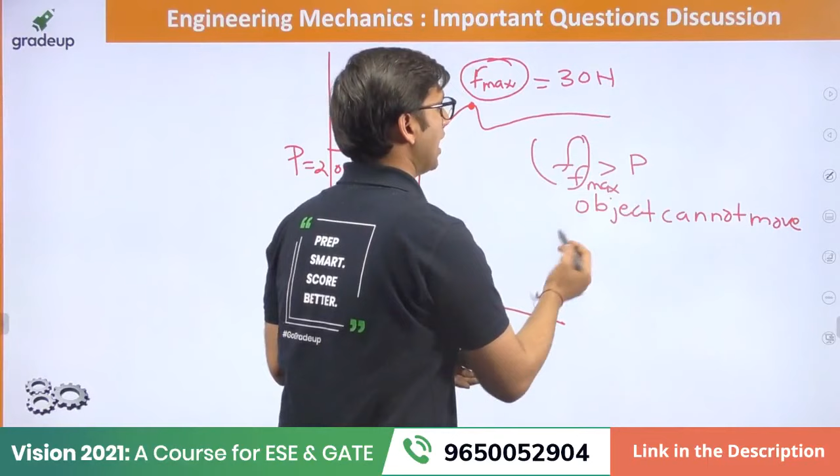That means object cannot move, that is, the maximum value of friction force is greater than the applied force. In that case, the force of friction value should be equal to 20 Newton. It will be equal to the applied load.

If the maximum value of friction force is greater than the applied load, the object cannot move. In that case, the friction force has to be taken as the applied force, which will be equal to 20 Newton. So the right answer will be 20 Newton for this question.

This kind of approach is important for the GATE exam because in 2019 there was a similar question, so you have to understand this concept. If the maximum value of friction force comes out greater than the applied load, then the friction force will be equal to the applied load.

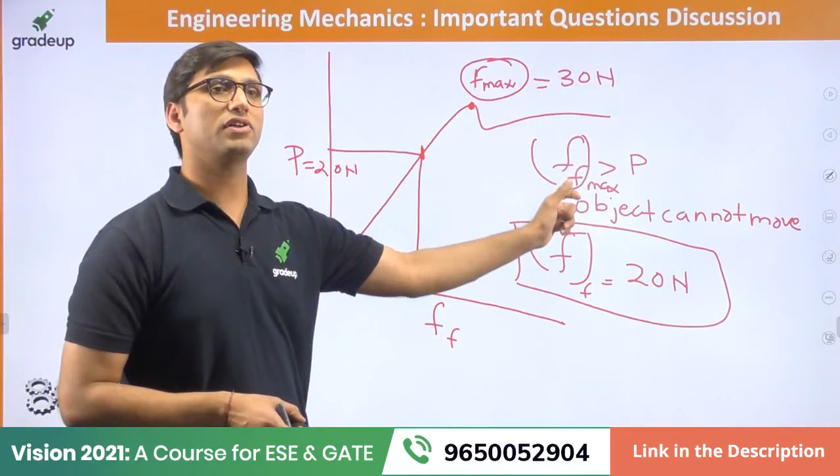The last question of today's session. Please solve this question. This may look like, yes, it is a previous year question. If we have to practice some good quality questions, I would recommend everyone practice previous year questions also.

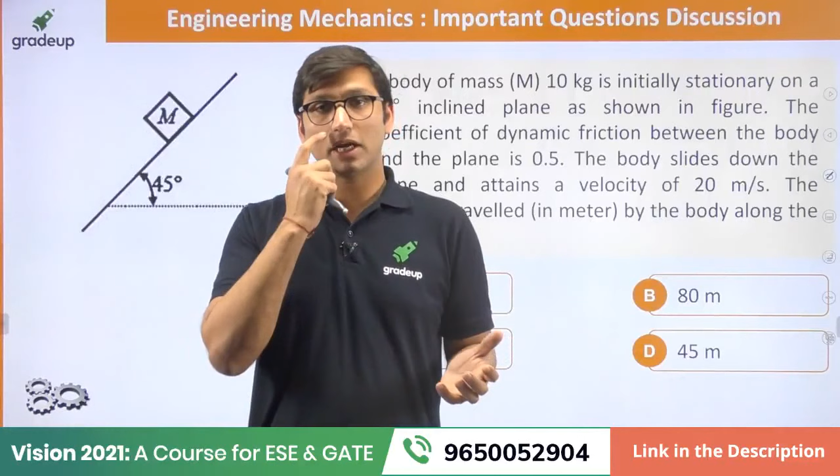Previous year questions give you a lot of idea about your level of preparation. If you are able to solve them very easily, irrespective of whether you have seen the solution before, that is another thing. But if you are able to solve the previous year question, that means your preparation is very good. So this is a previous year question.

I think that was asked in 2014, but the concept is always important. If it is a previous year question, that doesn't matter. The concept is important. Please solve this question and tell me the answer.

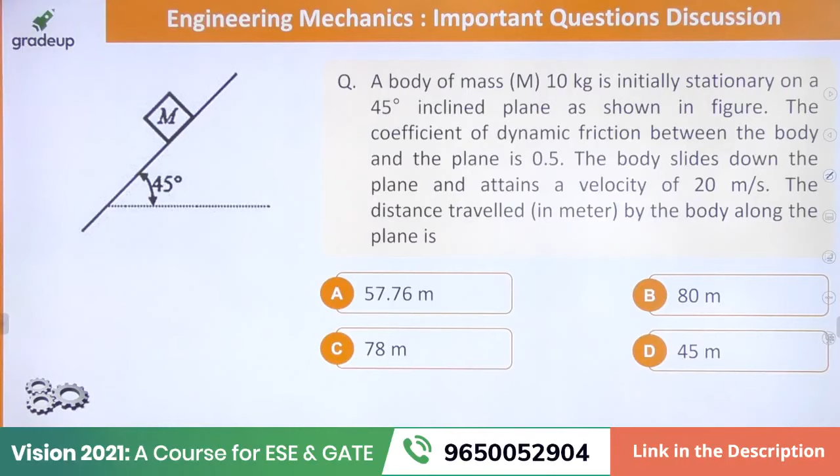Shivam Verma is getting option C, that is 78 meter.

This question is a bit lengthy. This question was asked in 2014, I guess, for 2 marks. So yes, this question is important and it is a previous year question.

Abhinandan Kumar is getting option 57. Drumit Trivedi is getting option A. Siddharth Patel is getting option B as the answer, 80 meter. So the right answer for this question is option A, that is 57.76.

What is the approach to solve this question? In this question they have given a block of mass M resting on an inclined plane at a 45-degree angle to the horizontal. If you have to solve this question, you have to draw the free body diagram.

The weight will be mg here. And if this angle is 45, this angle will also be 45. So this will be equal to mg cos 45. And this force in the horizontal direction will be equal to mg sin 45. This is how you resolve the forces for this inclined block.

Now, if the motion of the block is in this direction, the friction force will be in the opposite direction to the motion. The normal reaction will be equal to mg cos 45. So the friction force will be equal to mu into N.

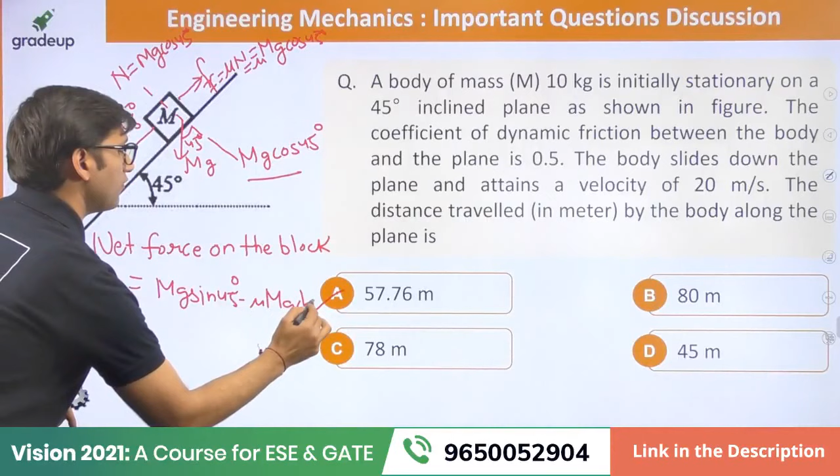The net force on the block will be equal to what? That will be equal to mg sin 45 minus, because these two forces are in opposite directions, mu into mg cos 45. So from here you will find the net force, and that comes out to be 34.6835 Newton. That will be the net force on the block.

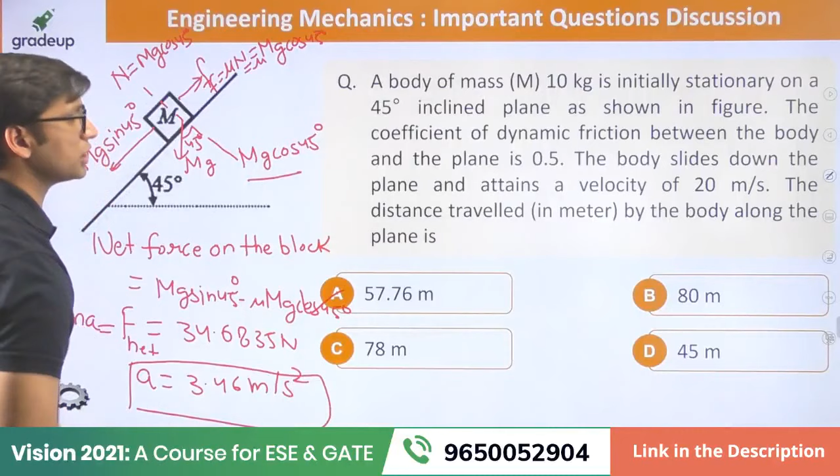Now this net force will be equal to mass into acceleration. The mass given in this question is 10 kg. From here you can find the acceleration: net force equals m into a, m is equal to 10, so acceleration will be 3.46 meter per second square. Now in this question you don't have to find the acceleration, you have to find the total distance traveled by the body along the plane.

So how can you find the distance? In this question you have to apply three concepts: free body diagram concept, force and equilibrium concept, friction concept, and the kinematics concept. The third equation of kinematics is v square equals u square plus 2as.

Here you have to find the distance, so this is the value of distance. Acceleration is known to you, velocity is given in the question. The body slides down the plane and attains a velocity of 20 meter per second. So let us say the initial velocity is equal to 0, final velocity is equal to 20.

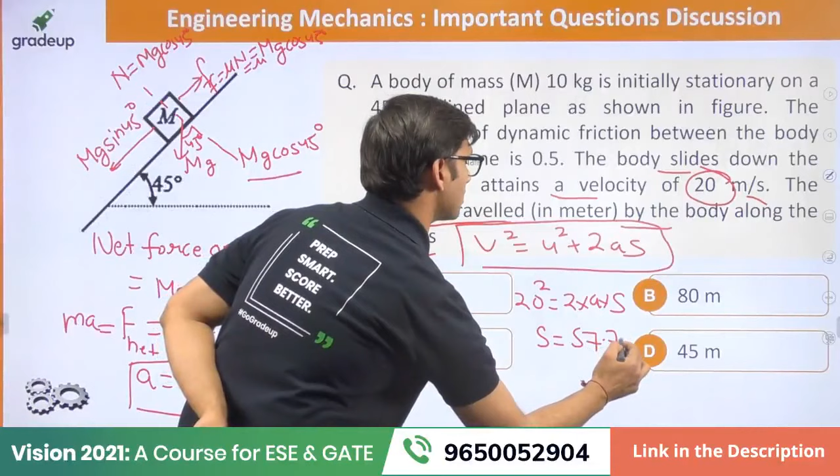That will be 20 square equals 2 into a into s. So from here you will get the distance. S will come out to be 57.76. That will be the value of distance. So this is how you are going to solve the question.

56.568 is not the answer. The right answer is 57.76. That you will get by applying these three equations.

So first approach, this is the third equation. This is the second equation, force balance equation. And this is the first approach, by applying the net force on the block. You have to apply the concept of friction.

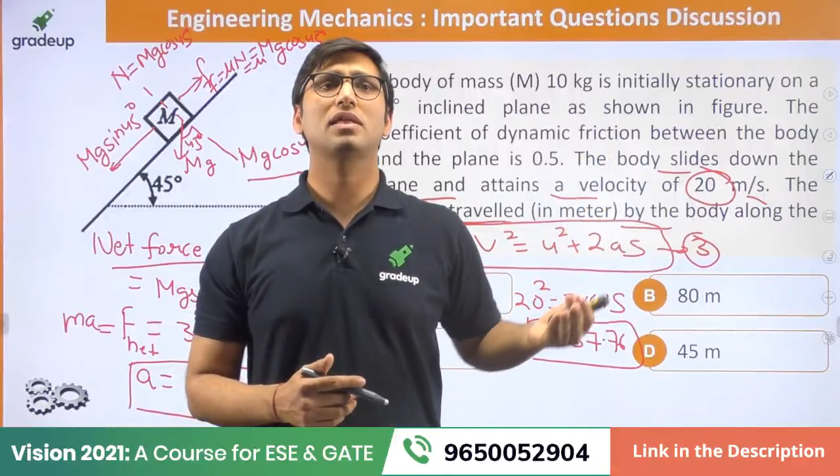This was a previous year question, and previous year questions give you a very good idea about the level of questions asked, and about your level of preparation. This was a good question. This is how previous year questions or GATE questions combine 2 to 3 concepts in a single question. So the right answer is this, and it can be solved by this approach.

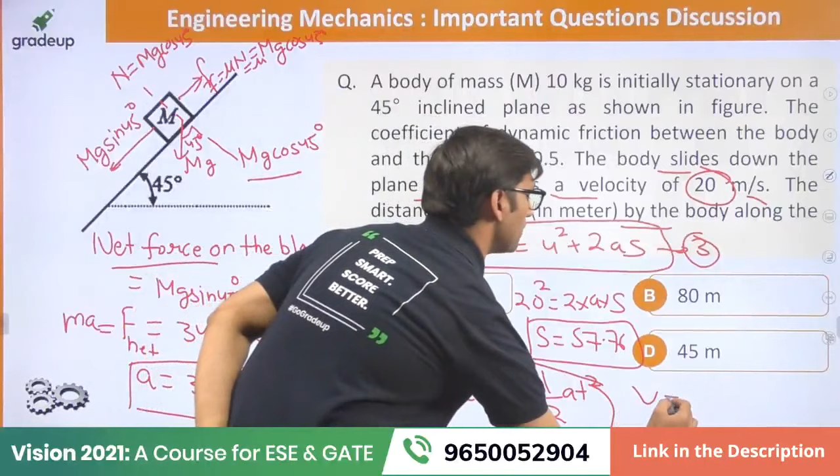One more thing, this question can also be solved by using s equals ut plus half at square, that is the second equation. Now time can be found by using v equals u plus at. From here you can find the value of time, but that requires 2 equations to be used. But you can directly use the other equation to solve the question.